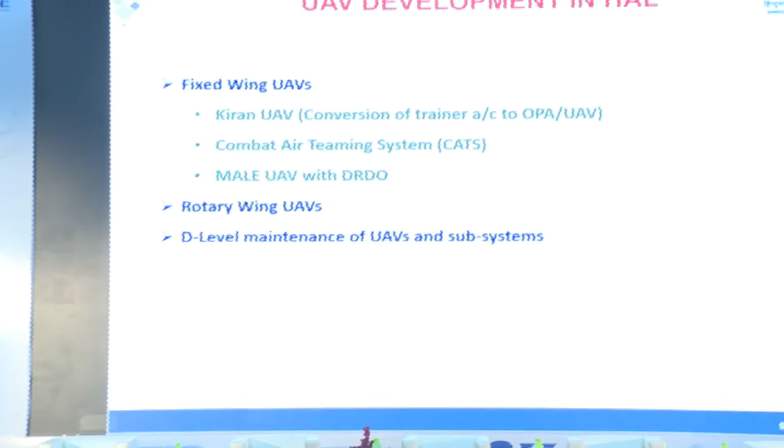We also work very closely with DRDO on development of large UAVs like medium altitude long endurance UAV and HALE UAVs. We are also working on rotary wing UAVs. Initially we worked with IIT Kanpur, and now we are working on a larger class of rotary wing UAV. In addition, HAL has established a facility for depot-level maintenance of UAVs, which services are already using. So we have a wide spectrum of UAV applications in India.

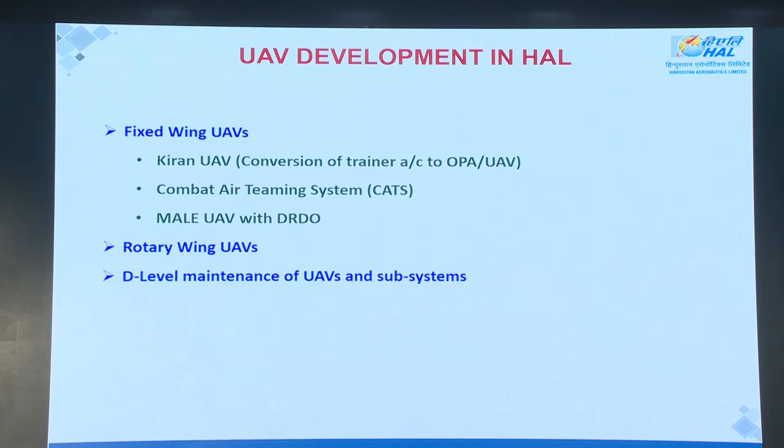So I will go straight into the combat air teaming system. Over the last two days we heard from a number of eminent speakers that manned-unmanned teaming is an important area which will be the future, and may be one of the essential elements of 6th generation fighter aircraft. Under this program, we are working on a number of teaming elements.

When we talk about manned-unmanned teaming, people may think it is combining a large UAV with another manned aircraft. But we have a different and unique approach, wherein we have a combination of small UAVs from 30 kg onwards to a large UAV. So we have a variety of platforms which can be part of the combat air teaming system.

This is a unique feature that we are achieving by integrating some of the smaller UAVs directly on the aircraft, while the larger UAVs operate independently by flying parallel to it, with only control and communication maintained with the manned aircraft.

This kind of approach is mainly possible because HAL, as I explained in the previous slides, has experience in integration of missiles, and also has the development background. With all this experience put together, we are able to achieve such a unique combination.

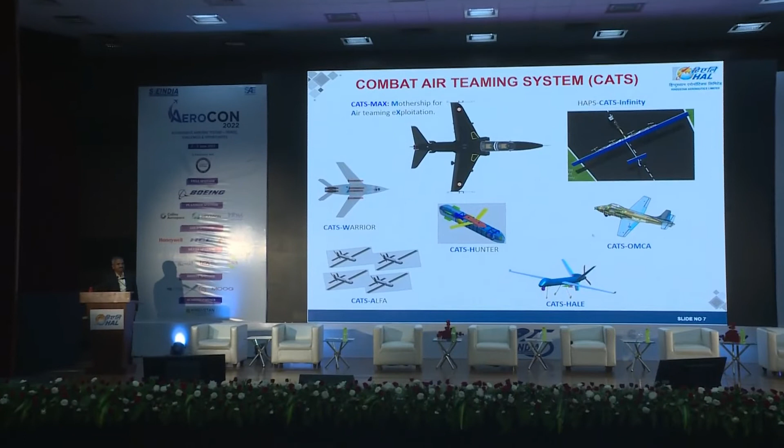So the central part of the combat air teaming system is what we call CATS MAX, that is the mothership, which is nothing but a manned aircraft. Around that, all these elements are operated.

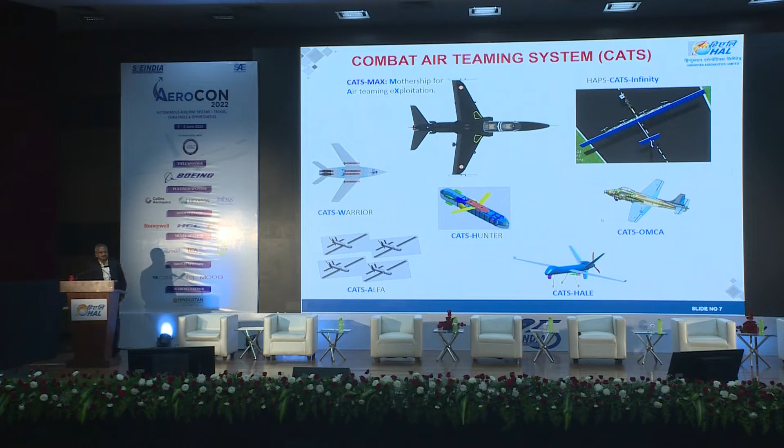We have CATS Warrior, the unmanned wingman aircraft, and CATS Hunter, an air-launched remotely controlled asset, and we have CATS ALFA, an air-launched flexible asset. In addition we have the optionally manned combat aircraft, HALE UAVs, and solar-powered high-altitude pseudo-satellites. I will briefly tell about each of these programs, how we are developing them and how we are working together with industry for this development.

First, CATS MAX, the central part of the combat air teaming system, which is a manned aircraft. Typically it can be a two-seater aircraft, so that one pilot can exclusively monitor the teaming system.

This aircraft will be slightly different compared to a typical aircraft, in that it will have a large display where the complete situational combat awareness will be shown. Based on that, the pilot can take decisions on how to control different assets.

So all the assets—some attached to the aircraft, some flying in parallel to it, or some flying a little away—can all be closely monitored, and you can receive commands and situational information from those assets. You can also send commands to the unmanned systems in case an attack is required, or to concentrate on a particular area. Such decisions can be given.

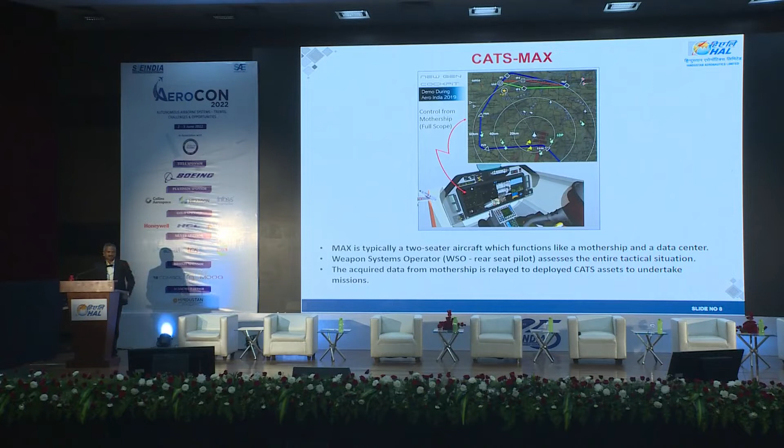And since it is low cost, it can be made as an attritable asset. But still it will have enough combat potential—it can fly at fairly high speed, carry a useful weapon load, and have low observability features. Because of these low observability features, it has the possibility of entering enemy territory, since the essential ingredient of the combat air teaming system is giving a stand-off capability to the manned platform.

Manned platforms unnecessarily should not be exposed to the enemy air defense system. So nowadays, the biggest concern in military UAV application is the ability to penetrate protected airspace and get useful information or do an attack. That is right now not there.

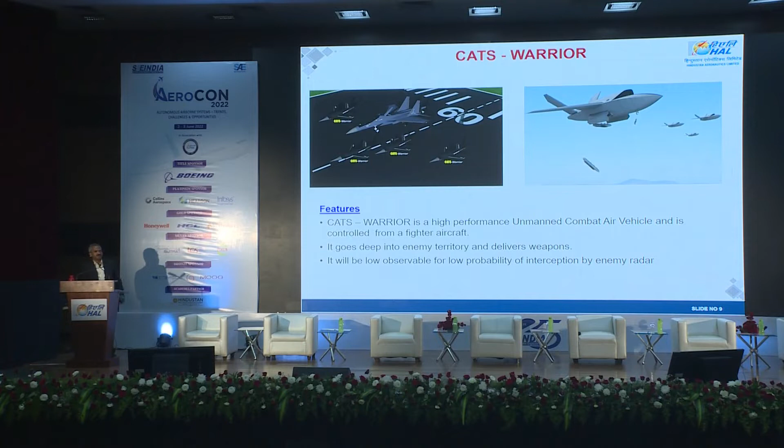In most cases wherever the US operated, the airspace was free, controlled by their own air force. That's why they were able to freely go and do whatever they want. In a situation where India is there, it may not be practical. That's why we have to develop such low-cost assets to do all dangerous missions.

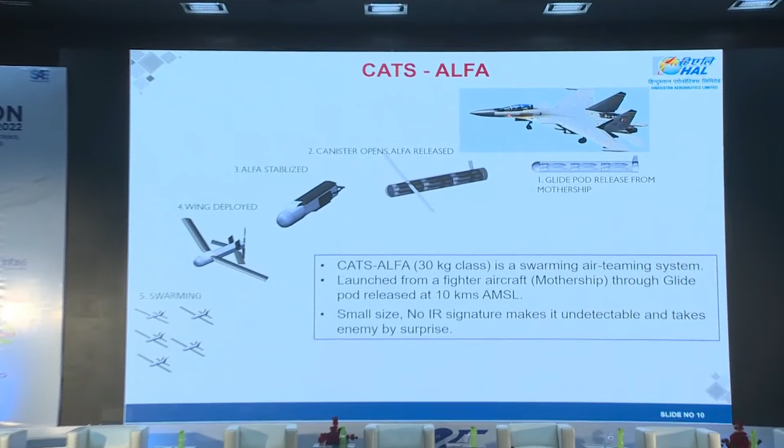Another one is CATS ALFA. Like I was mentioning, the previous one is a big aircraft. It can take off and fly along with the manned aircraft, go do the job, and come back. In case you want to deploy small UAVs, we have seen in a number of use cases and studies that in future, this swarming of UAVs, a flock of UAVs, is going to create havoc, because when it's more in number, the defense system will find it very difficult to tackle such numbers.

So right now, people are working on ground-based small swarm UAVs, but when the UAV is air-launched, it will have better reach, because you can launch from higher altitude, so it can benefit from gliding, and also you can go close to the area of conflict. You need not have a permanent base there. So such advantages are there.

In this concept, we have some 30 kg class UAVs. These UAVs are packed in a container similar in shape to a glide pod, which is mounted on the mothership aircraft. When the mothership commander finds that a number of small UAVs need to be sent, he will release the glide pod. Since the aircraft is flying at a higher altitude, the glide pod can glide for some distance, after which it will release these small UAVs.

These small UAVs will have their own propulsion system, battery and motor. Like any other mini UAV, it can fly further. It will do different functions based on requirement. Some of them have cameras, and everything will be connected through data link. It will have camera, and some will have ammunition also. If you find a useful target, it can attack.

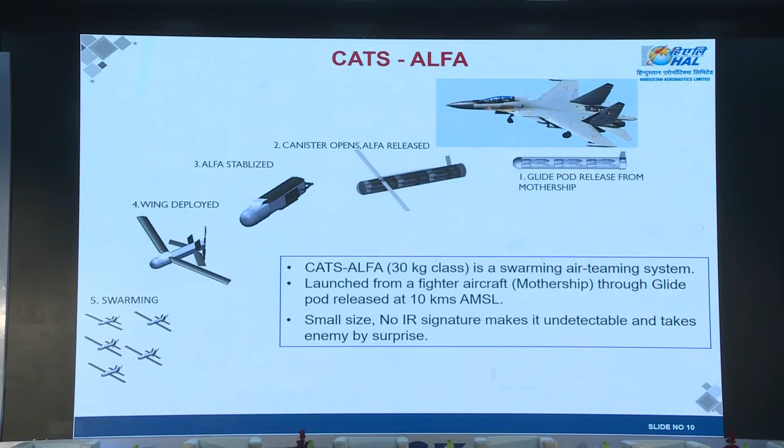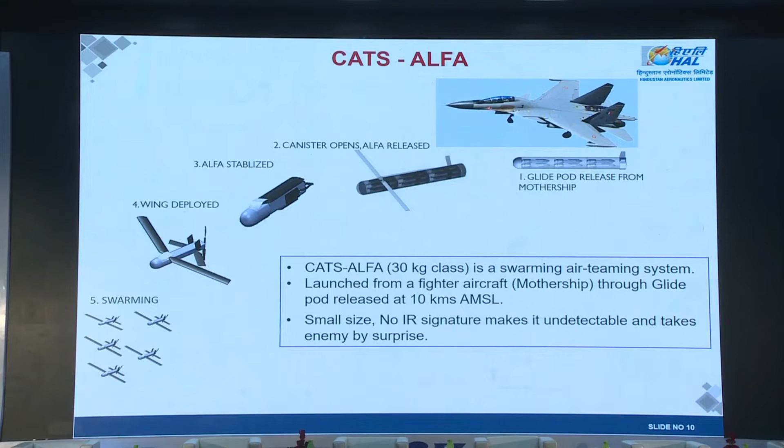One of the important aspects is, when we want to do these things effectively, the pilot sitting in the cockpit cannot have complete control over each and every element. So a certain element of artificial intelligence and own decision-making power is required for these UAVs. These things we are working on in parallel. Importantly, this kind of small UAV we are getting from startup companies. We are engaging some companies who are very agile and already working on such similar concepts. We are working on integrating those things onto larger aircraft, so that overall the mission can be more effective.

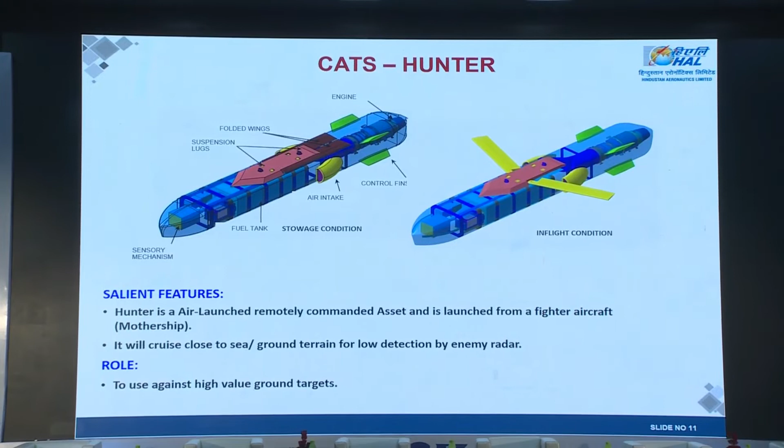Another one is CATS Hunter. This one is a remotely commanded asset. The difference from the previous one is that this one is slightly larger, so it will have larger weapon capability. This is also carried on an aircraft and released at higher altitude. It will be powered by some kind of turbofan engine, because of which it can cruise very close to the terrain, making it a little undetectable, and it can go and attack. So this is a useful asset in the CATS concept.

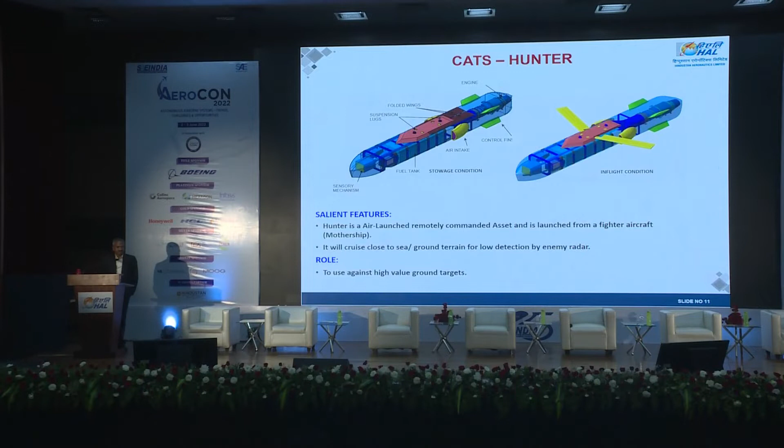Then another important asset is the optionally manned combat aircraft. We have a number of old, legacy aircraft which are ending their useful service life. Because of that, those aircraft cannot be used for traditional manned roles, but with a reduced envelope. For example, a trainer aircraft has to operate up to 6G positive and minus 3G. The structural life of the aircraft is determined by this factor. If you reduce these structural load factors, we can extend its life further.

So by this way, we can operate it in an unmanned role. In unmanned role, it can do formation flying and be sent into enemy territory for deceiving the enemy air defense system. This is one of the potential applications we can think of.

Since these aircraft are jet trainers, they can go at a higher speed of 375 knots, and so they can cover up to 500 kilometers. So it will be a useful asset. Instead of simply retiring, this can be converted into this kind of application.

Another one is the high altitude pseudo satellite. Persistent surveillance is one of the key elements in any battlefield requirement. We have satellites and we have high altitude long endurance UAVs. Satellites fly at very high altitude, and we don't have enough satellites to completely cover border areas. So this kind of solar power UAV can fly for 90 plus days at 20 kilometer altitude, and it can have very useful surveillance information, and also it can be used for communication.

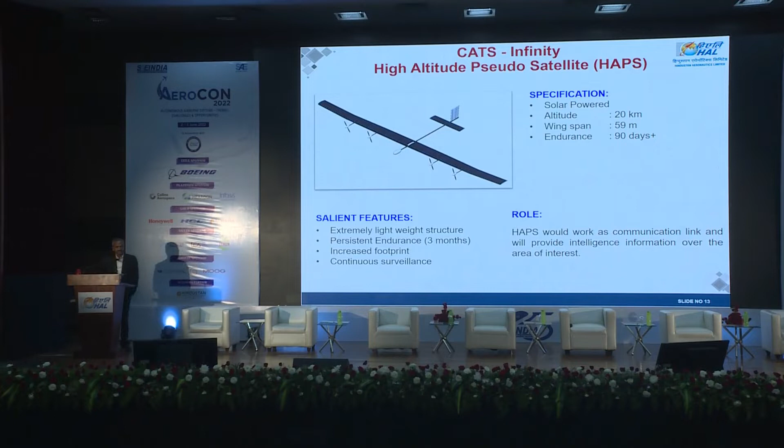This is an initial concept and proof of concept we are working on with a startup company. Further, HAL is working on a higher version. We are also working on a rotary UAV, up to 200 kg class. These helicopters have unique applications because they can land at remote places where a traditional runway is not there, or access is very limited. Particularly the Army is interested in this kind of UAV, and the Navy also will find it useful to operate from ships. So this development is going on. Up to 200 kg we are developing now, and in future we are going to expand further.

So now I briefly covered the product. Now I will tell a little bit about our approach.

Initially HAL worked as a solo designer, because HAL alone was nominated or instituted by the government as an agency to deal with aircraft. So we had all our divisions dealing with each part, from nut and bolt to all the components, done in-house in HAL itself. That's why we established a lot of divisions.

Later, as manufacturing capability in the industry increased, we went for outsourcing of components. Later we became partners to other organizations, because large projects require multidimensional thinking and a pool of scientists. That's why we started working with DRDO for aircraft development projects and UAV projects, and based on our capability, in some projects we are joint developers with DRDO and OEMs.

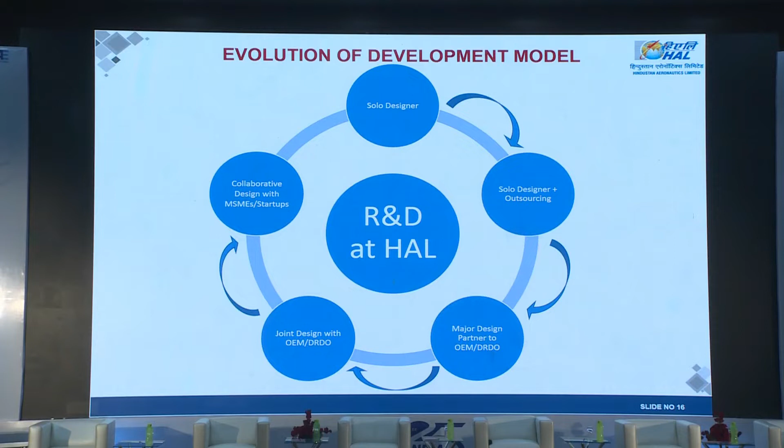But in the last 5 to 10 years, we are looking at it in a more different way. We want to do collaborative design. That's why we want to engage more and more MSMEs and startups. As a policy, HAL has recently taken the decision to engage startups in a collaborative way for all new technologies.

The ecosystem of any R&D organization, not only like HAL, has a number of entities. It includes suppliers from foreign countries, academia, startups, and DRDO certification agencies. Most of these aspects have been covered over the last 2 days, where they told about how each one is contributing to the development of the aircraft.

So we have an extensive relationship with academia. We have academia chairs in all prominent IITs. We have worked on a number of the latest problem cases - I just listed some of these things. Like this, we are working on many projects with IITs, and not only IITs, some other premier institutes also we are working with.

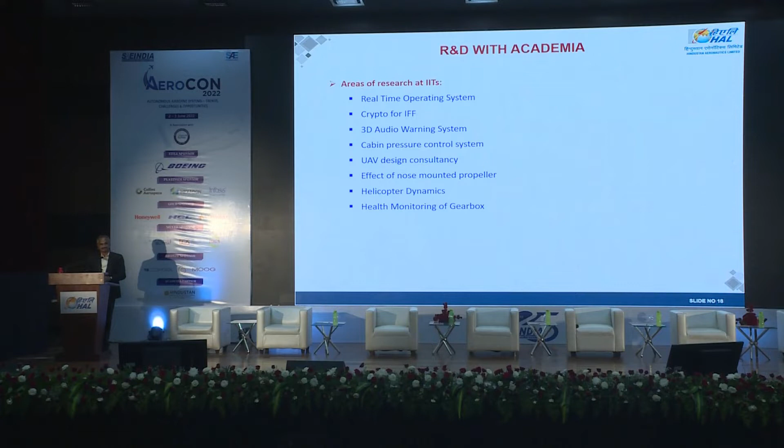I would like to highlight some aspects of indigenous solutions. Today, any aircraft or UAV we develop, our indigenous content is staggering around 60%. The government now prescribes a minimum of 50%, but however it should be more than 80%. Then only will we not have any dependency on foreign countries in case of emergencies.

So areas like aero engine, avionics sensors, artificial intelligence and software solutions, payloads, raw material manufacturing, and also complete new product solutions - these are all areas where HAL will be happy to involve the ecosystem so that our product can be matured, and solutions which are good in isolation can, when combined with a large platform, have a multiplying effect of effectiveness and provide a solution to the users. So we are looking for such things.

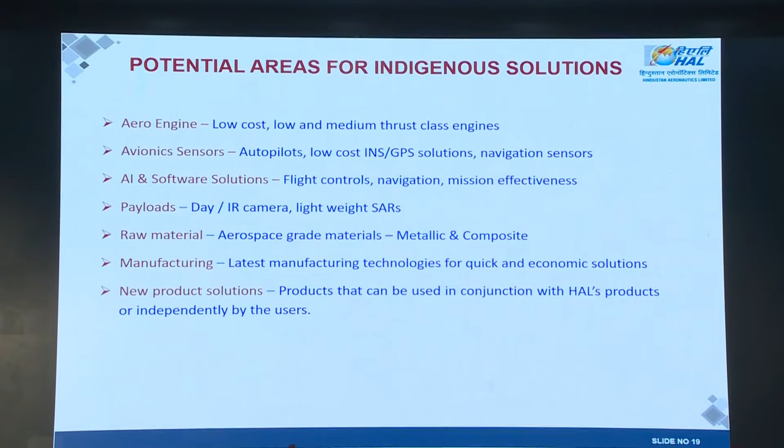In this context, we are also one of the major contributors to DIO, the Defense Innovation Organization. We are given some IDEX challenges also. We continue to involve the industry so that HAL projects, particularly UAV projects, will be beneficial to the nation.